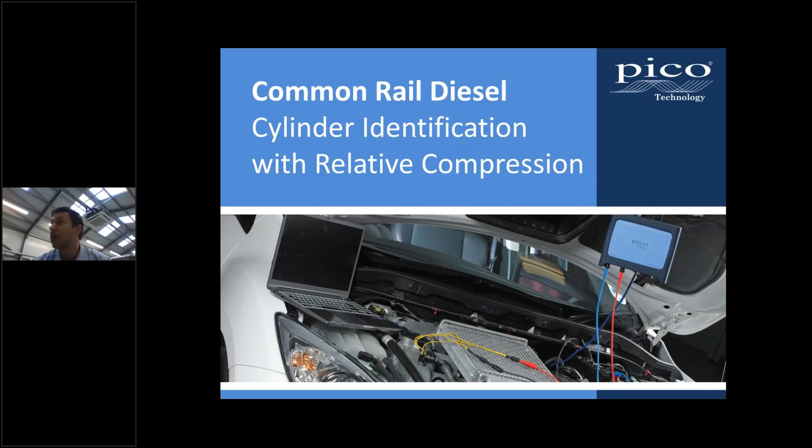To start with, we're obviously going to need to download the software, so PicoScope Automotive. To go there, you'd need to visit our website, which is picoauto.com, and then find the downloads page. When you do the download, you'll actually have two bits of software that are automatically installed at the same time: PicoScope 6 Automotive and PicoDiagnostics.

Now, to be honest with you, a lot of people that we speak to never really use PicoDiagnostics to its full potential. Hopefully after today, you'll see how simple and non-intrusive it is to actually get some really useful information from it.

So as I said, the idea being non-intrusive. The two that we're actually going to look at, you'll see there's a number of different options when you open the program. The two that we're going to be mostly focusing on today are the battery starting and charging, and the compression test.

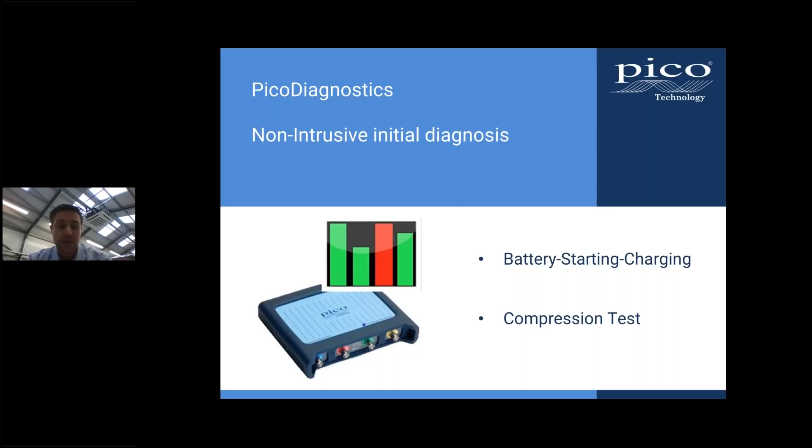Okay, so onto the connection. So we'll start with the battery starting and charging and how to connect. It's very, very simple and straightforward. All we're going to be doing is taking our PicoScope and we're going to connect our x1 test lead, and we're going to connect the signal wire to the battery positive and the black signal ground to negative, and we're going to use our 2000 amp current clamp around the battery positive or negative, whichever is easiest to get to.

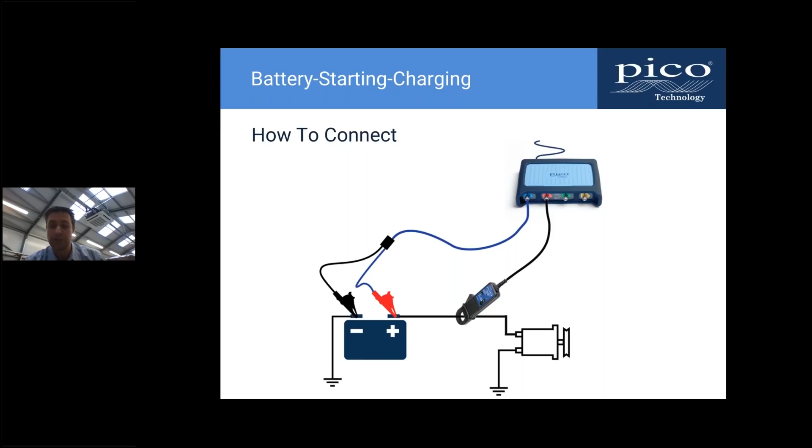So we're just going to move to another camera so then we should be able to have an overview of what we're doing. So there we go, right, so I can stop now.

So Barney, we should still just have me on the camera now. Is that correct? Yeah, perfect.

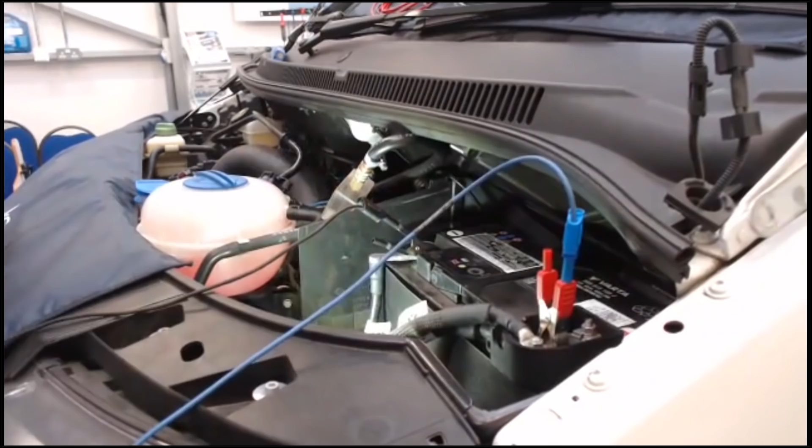Right, okay, so if we move across, so we have our scope already connected to our computer. If we look at the battery, we have a x1 test lead. We're going to take our signal lead onto battery positive and our signal ground, or our ground lead, onto battery negative. That will then be connected into channel A, and then the current clamp.

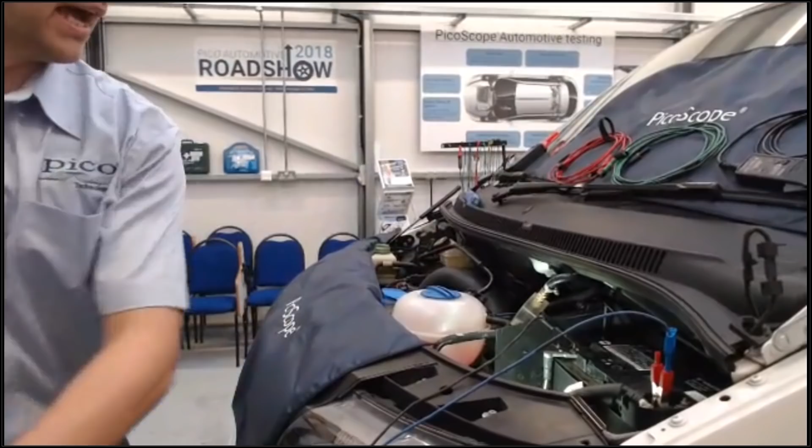So you'll see from the current clamp itself, we have two different options: 200 amps and 2000 amps. For this test, we are wanting to be on the 2000 amp range. Now you should see that we have... we'll just wait for that. That's breakfast van coming through, perfect.

So yeah, as we were saying, the 2000 amp current clamp will have the battery on light. Now this clamp actually has a function where it will automatically turn off. To prevent that from happening, we can actually turn the clamp off, press and hold the 0 button, and turn on. Now we have the red light on, which means the clamp will stay on permanently until the battery runs out. For the purposes of the test today, we're going to leave it on because I don't really want it going flat or turning itself off halfway through.

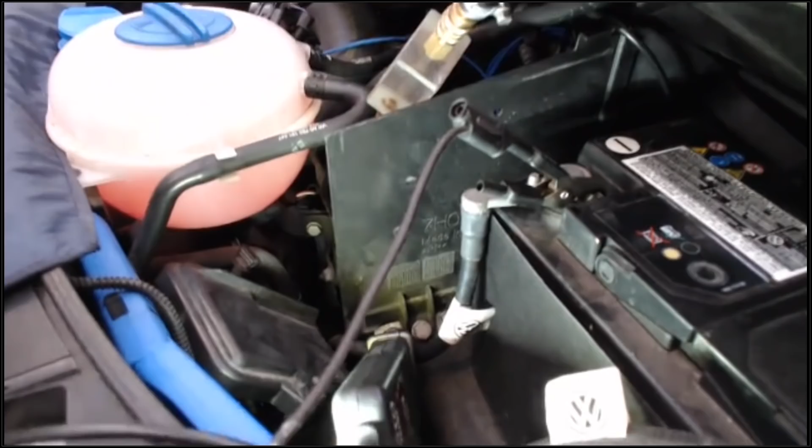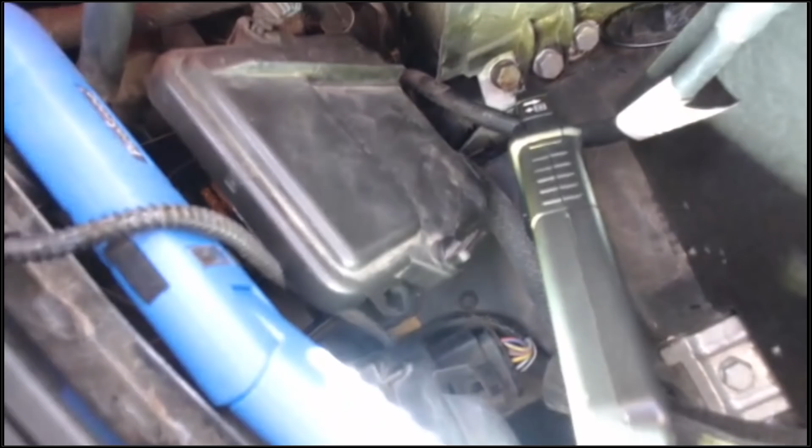So we're going to use the battery negative to clamp the current clamp round. We can see the arrow on the current clamp, if you can get in there, Steve, and see that—you should see the current clamp arrow there. For the battery negative, obviously current's flowing back to the battery, so we can point the arrow towards that point. If it was on the positive side, then the arrow points away.

Current clamp then on channel B, and that's it, that's our setup done. So what we can do now is I will come back to this camera. We will reshare the screen, and we are actually going to look at the PicoDiagnostics program.

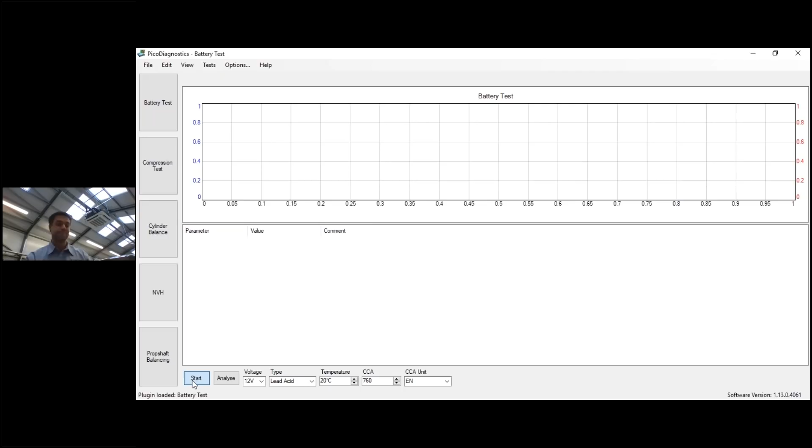So with everything set up, all we need to do now is start. I'll run around and start the engine.

So I'm happy that this battery is good, so I can move on to the next tests.

Just want to move back to the presentation. So that's the connection done.

Making sure that you've got a good battery and good charging system is one of the very first things that you do in your vehicle health checks. That's quite a nice, easy, important one. And with this result, we can also print this off and give it to the customer. So quite a nice, useful tool to prove that you've done something, but without having the need to buy expensive battery test equipment.

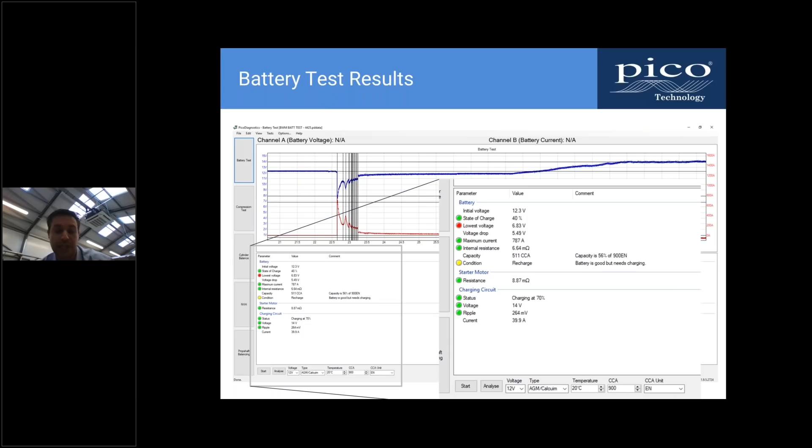So the next test we're going to be looking at is the relative compression test. Now for this test, it's even more simple than the original battery test. So all we're going to need is one test lead, which goes across the battery, as we can see there.

We do need to be mindful that we need to make sure the engine can't start. So we need to prevent the engine from starting, and ensure the battery can support 6 seconds of continuous cranking. As I said before, the reason why we do the battery test first is to make sure that the battery is capable of cranking the engine for that period of time.

Important thing again to mention there is prevent the engine from starting. So to stop a diesel engine from actually starting up, there's a number of different ways. We can disconnect the injectors, take away the fuel pump, crank sensor, or just completely remove the fuel supply altogether, which will result in the vehicle not starting. So picking the most accessible is usually the quickest option. Normally the injectors themselves can be just removed quickly.

So if we just now come back over to the vehicle and how we're going to do the setup.

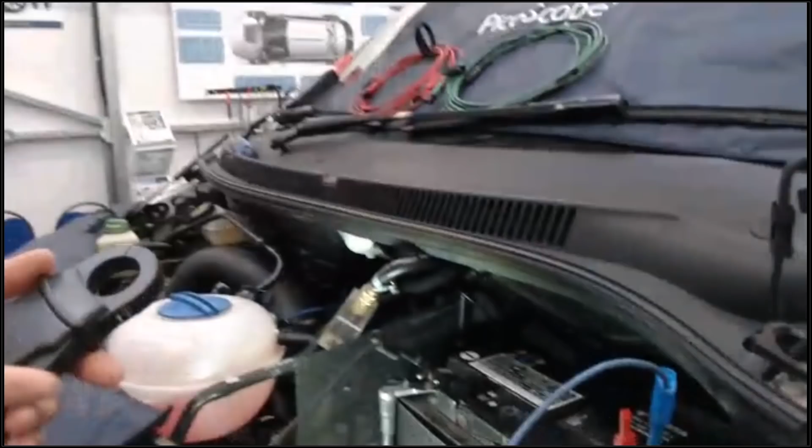So as I said before, we don't need the current clamp anymore, so we can remove this from our setup. And all we're going to be doing is just using a simple test lead across the battery, and it's only battery voltage that we're interested in at this point. This makes it a very simple and very quick and easy test.

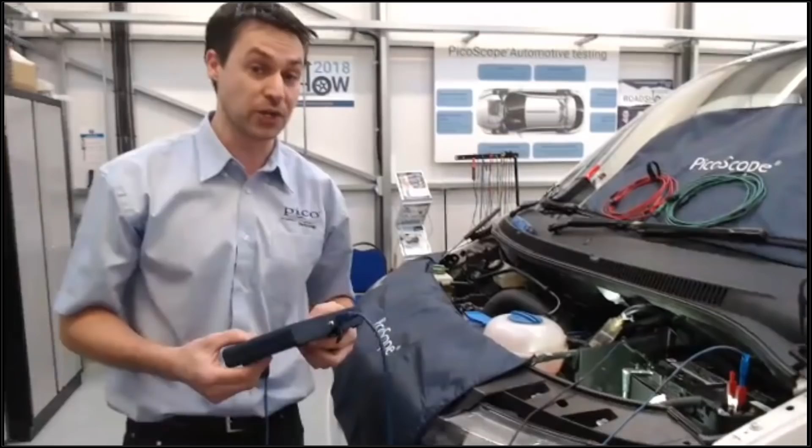Okay, there we go. Right, perfect. We should be back up now. Fingers crossed. Said to be patient.

So we come back into the engine bay. Now what we're going to do in order to prevent this vehicle from starting, we actually have a nice easy fuse just down under here. This fuse provides the power supply for the inlet metering valve. So if we remove that on this vehicle, the inlet metering valve removed, it will no longer start. So we can perform our relative compression test very easily, not having to go anywhere near the injectors. It's very simple.

Okay, can go back to our PicoDiagnostics program. And to do that, we're now going to click on compression test. It will ask you if you wanted to save any data. If it's a customer's vehicle and you want to collect all your evidence, make sure you keep it saved. For us, to fill out on this point, we need to tell it how many cylinders it's got, make the connection across the battery, and press start. Ensure the throttle is held fully open during this test. That's fine, okay, and if we could crank the engine please.

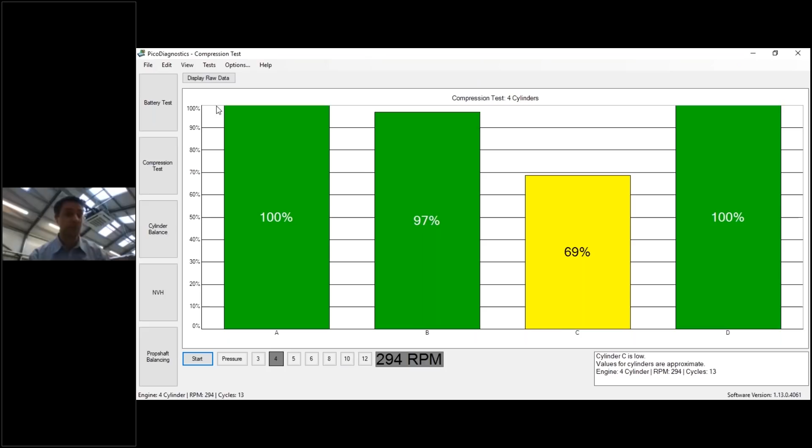So the whole purpose of this presentation, then, in this webinar, is how can we actually determine what cylinder that is.

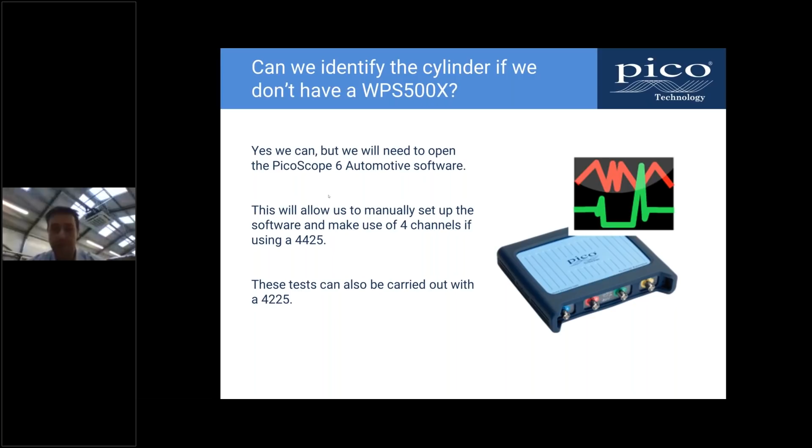So, setting the scope up manually for relative compression. Now, if we've never seen this screen before and we're new to oscilloscopes, something to get into the mindset about: don't be afraid. Connecting the scope up to a vehicle is no different to how we would use a multimeter. All we're introducing now is a time factor.

So the screen that you're presented with is formed up of a grid. Now this grid is split up into a number of different ways, and we now have things called divisions. Across the screen you should be able to count that there's 10 divisions, and the voltage axis for whatever range or accessory we're using is now in the vertical axis.

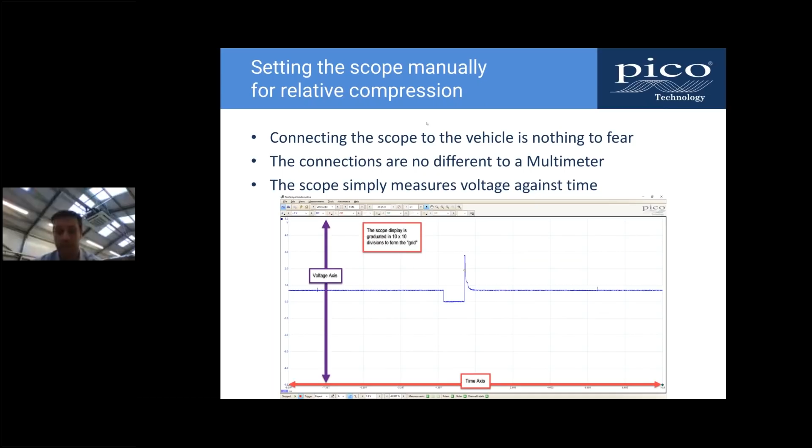Right, okay, so taking your first measurement. We can set the scope up to capture any signal automatically. There's a couple of things to remember, and it's up to you, but I like to try and remember what probe it is I'm using, what the range is, how much time do I need across the screen, do I need a trigger?

So our first thing, which displays... there we go. Hopefully now guys you should have the slide with probe setting on the screen. So selecting the correct probe is essential to a good capture. There's no point looking at battery voltage when you've got a current clamp set up, it will be in completely the wrong scale. So make sure that we're selecting current probe if we're measuring current.

Now for the next bits of the test, we'll come back to that as we move forward. We'll do this live as well, and I will set this up live within the software. So you'll see you'll be able to click on channel A. It will give you a drop down, and where it says ×1, which is our current default, our ×1 test lead, you'll now be able to click on that box, and it will bring up a number of different options for you to select.

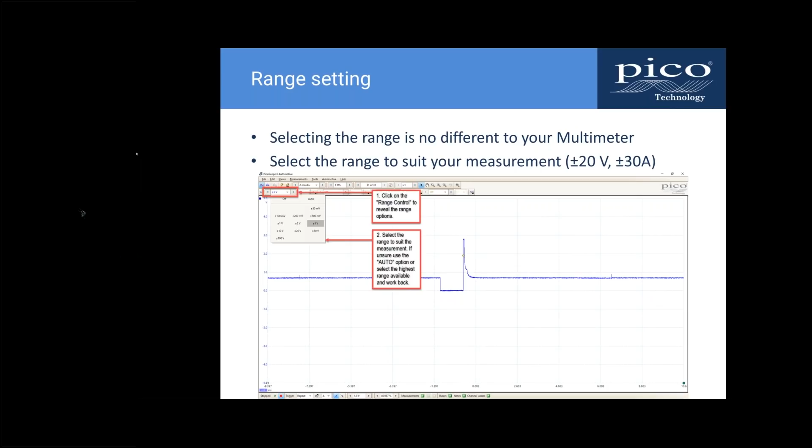So the next bit to be aware of is the range setting. Again, no different to your multimeter. Instead of twisting the dial to select whether you're looking at current or voltage, we just need to make sure we're selecting a range that's good for our measurement. If we're looking at battery voltage, make sure that you allow for ±20 volts. You could just leave it on auto and it will automatically do it for you if you're not sure. But also make sure if you're looking at current that you've got the highest one. If you're looking at maybe injectors, go for your highest one first, and then step down if it looks like it's too far out.

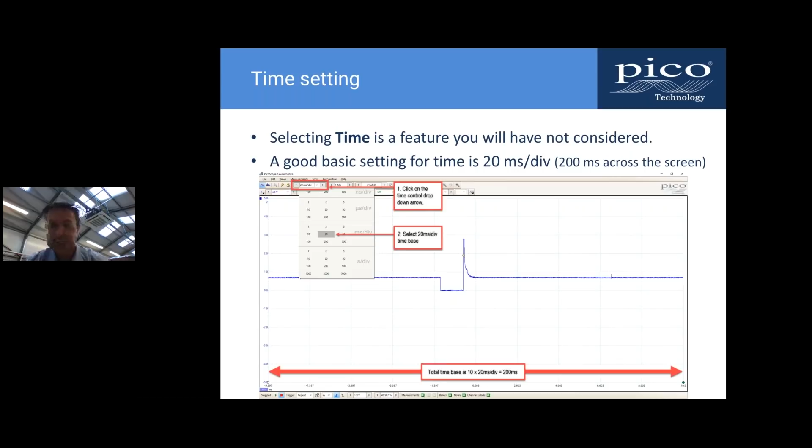And onto trigger setting. Whether or not you want to put that in, triggers do help stabilize your waveform on the screen. When you set a trigger, it has to meet certain specifications that you put, so the waveform has to cross certain points for it to actually be stabilized on the screen. One of the things we would always advise, if you're not used to using triggers, is to use the auto trigger. What that will do is wait for a certain period of time, and if the trigger isn't met, it will carry on. Using the other settings, which are repeat and single, if the waveform doesn't pass through the specific conditions that have been set, you won't have anything happen on the screen, it won't work. So as long as we want to make sure that we've got something on the screen, I suggest just using the auto button to begin with.

Another important factor here to mention is our sample rate. I'm just going to wait for that slide to load. Typically for automotive use, we found that 1 million samples is more than enough for what we need to do and gives us good detail, especially when zooming in. So stick to 1 million samples.

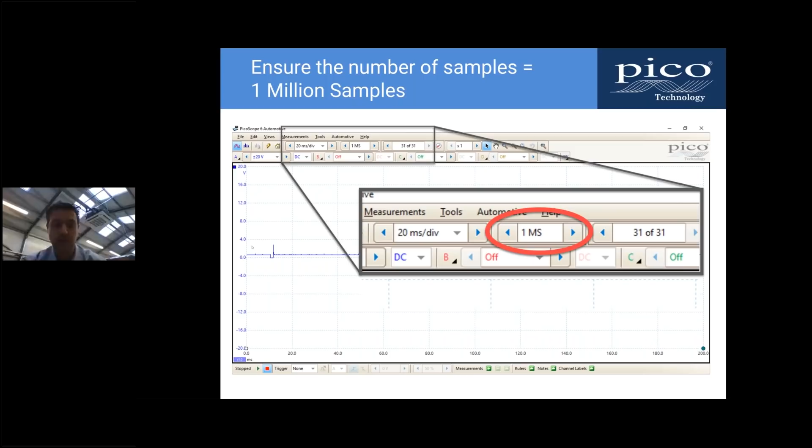Okay, so what we're going to do now then, guys, is we will do the setup and do a capture as we did with our PicoDiagnostics software, but this time we're going to do it in PicoScope 6. Now, you'll notice I put on there about the initial results. I'm going to use a current clamp for this setup, only because it's easier to associate a peak in current as a compression event. So, as we said before, pistons coming up on compression will naturally draw more current, or the starter motor will draw more current in order to keep the engine rotating. So it's just more of a visual thing than anything else. There'd be no reason to not use voltage if you're more comfortable using that.

Let's just go quickly back to our camera, and we'll just show you the setup from that point of view.

There we go. So again, we're going to use the same idea as before. We're going to prevent the engine from starting, so we've still got the fuse removed for the inlet metering valve.

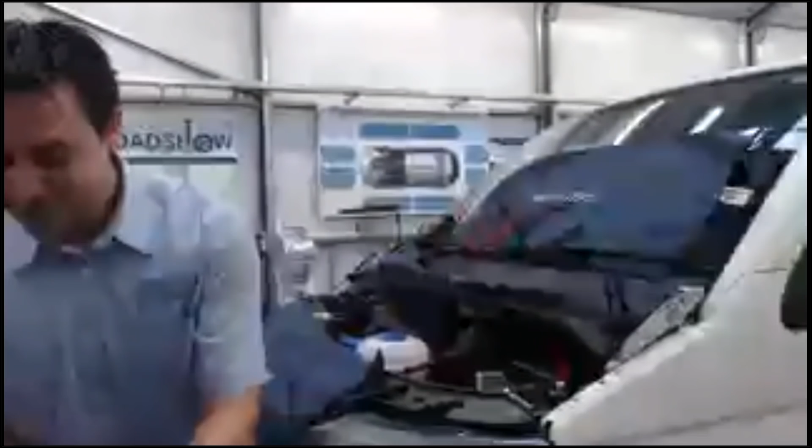Now instead of voltage, we're just going to take the test lead off and use the current clamp instead. So current clamp back on again. We'll put it into staying on all the time, permanently on. Again, round the negative lead, and onto channel A. Okay, lovely.

If you wanted to just have a little play, have a little look at some of the other files - if people have sent other files in as well - there's nothing to stop you just using the software, getting to grips with it, having a go and seeing where all the different things are. Obviously when you're good and ready, then get your scope connected and go from there.

Time-wise, as I said, this is something new when we're looking at an introduction to oscilloscope diagnosis. For this cranking test, we obviously want an extended crank. If we remember that the grid is split up into 10, if I did 1 second per division, that now gives me 10 seconds across the screen, which is more than enough to perform a relative compression test.

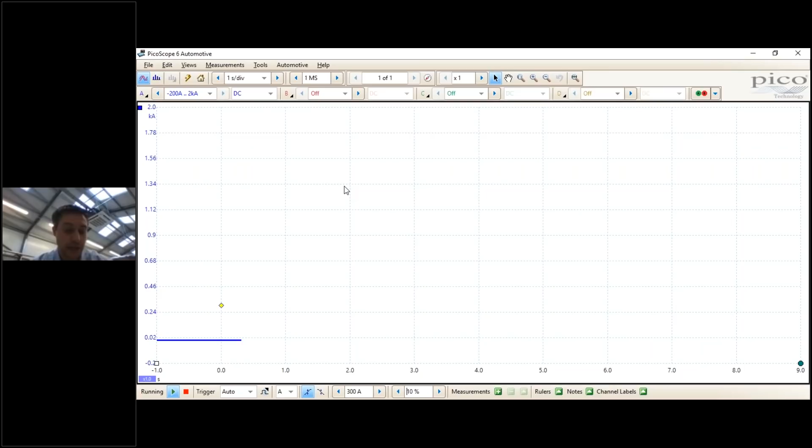Now, as you can see, just before the waveform actually comes up to that trigger point, it stops for a second and then continues. When we're saying about using auto in the beginning, it doesn't matter if your trigger doesn't meet those requirements, or if your waveform doesn't meet the trigger requirements, because it will still capture something on the screen.

For what we're going to do today though, I'm going to put this onto repeat, and you should see now that that waveform does not pass that diamond until we've met the specifications which we've set, which needs to be 300 amps. It needs to see 300 amps in a rising direction, and that's when I want the software to start capturing data.

So, Barney, yeah, if we can crank the vehicle. Thank you.

So there we go, guys. So I can skip back, and there we have it. That is our relative compression waveform from PicoDiagnostics, but now in PicoScope 6 Automotive.

Within here, obviously, we've got a number of different tools. So we can zoom in on certain parts of the capture, and you can see here also that we've got these rulers on the side, so I can bring these down and start actually making measurements should I need to.

All I'm interested in at the moment though, is this drop, this oddity or anomaly within our waveform capture, where we have 3 very good peaks and then 1 not very good. So this is the one we're going to focus on. This is the one that's reported in PicoDiagnostics as a cylinder down on compression. So now, how do we identify what cylinder that is?

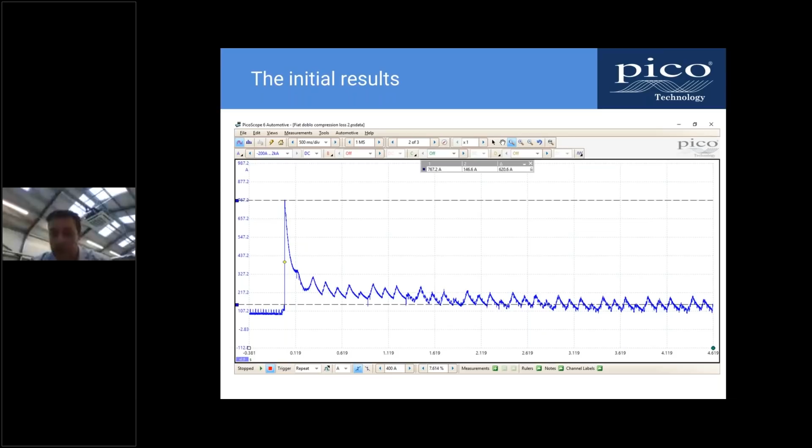So, determining cylinder 1. Wait for that to come on. It should be there in a second. There we go.

When identifying cylinders, we normally use an ignition or injection event for cylinder 1, and then use the appropriate firing order to determine the rest.

As before, to carry out the relative compression test, we have to prevent the engine from starting. But disabling the engine on a common rail diesel removes the injector signals. So how would we actually determine which cylinder it is? How do we get our reference for cylinder 1? How would we start to do that?

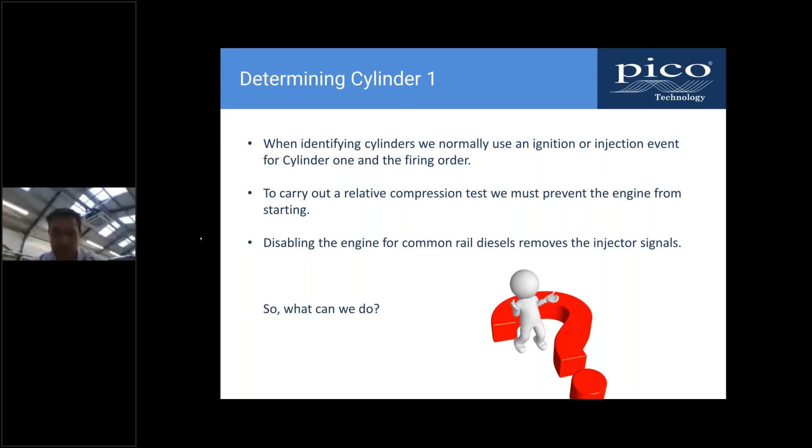One of the things we can do is start thinking about constant signals. When the engine's rotating, what else is rotating as well? One of the things that comes to mind is obviously the camshaft. So if we could use the camshaft position sensor, which is used by the ECM to determine cylinder identification, then we can do the same.

By running the engine and viewing the camshaft position signal with cylinder 1 injector, we can see the relationship between the two. Once we know that relationship, if the injector signal is no longer present, we can run our relative compression test with our camshaft position signal and then determine which one was cylinder 1.

Some points here, guys, we do need to be mindful of timing. It may be that cam-crank timing is out. What if the vehicle comes in and the timing has shifted? So actually we've got a valve, or the compression issue is due to valve damage, no longer holding compression. If that's the case, we need to be mindful of that going forward.

But we'll look at something called the Waveform library, if we're not already aware of it, and how we can use it to determine cam-crank timing going forward, and making sure the engine mechanically is okay as well.

So, should we get to the next one? Right, okay, so let's do the setup then, guys.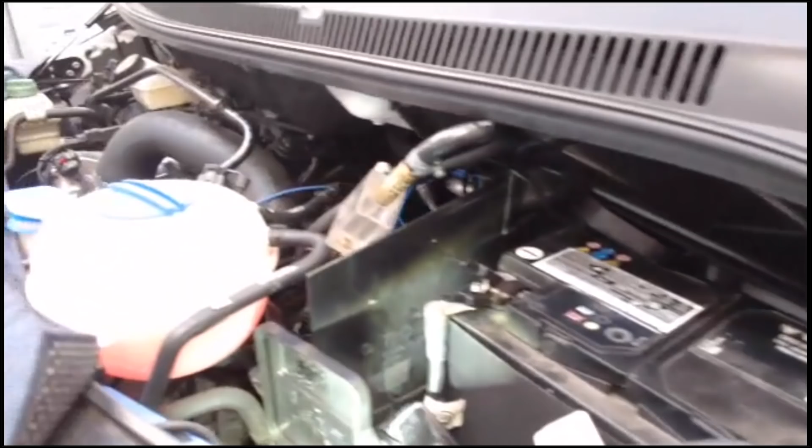So for this test, we're going to keep our relative compression test on channel A. We now want to introduce cylinder 1 for our reference. The best way to determine the cylinder 1 injector is using the current clamp. This is a great little clamp, gets in nice and easy, plus it's non-intrusive, so we're not having to disturb any of the wiring.

In this instance, we have put a breakout lead on the cylinder 1 injector, only because it's actually trapped underneath part of the inlet manifold. So bear that in mind when you're looking to get your reference.

You don't have to use cylinder 1. If it's easier to get to cylinder 4, why not use cylinder 4? Just bear in mind that when you're looking at it, you know that that's cylinder 4, and then set your firing order accordingly.

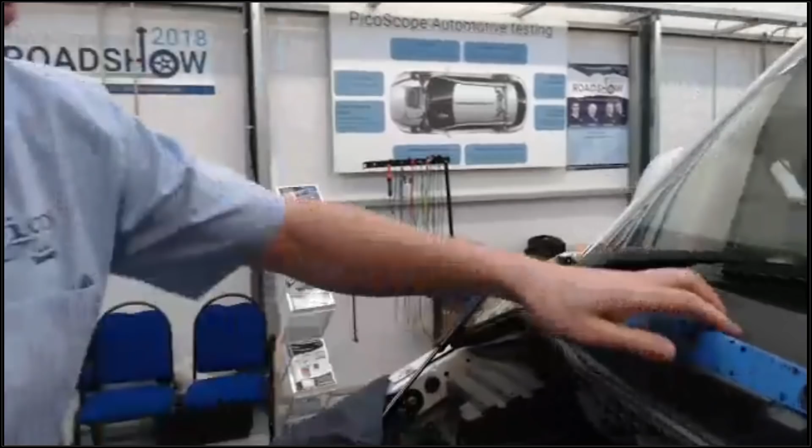So for us, we are going. We can get in there. Let's just shed a little light on the situation, so you can see the breakout lead we've got there for the cylinder 1 injector. Oh, drop the torch.

Current clamp onto the breakout lead, zero the clamp once we're in position, and then put this on channel B.

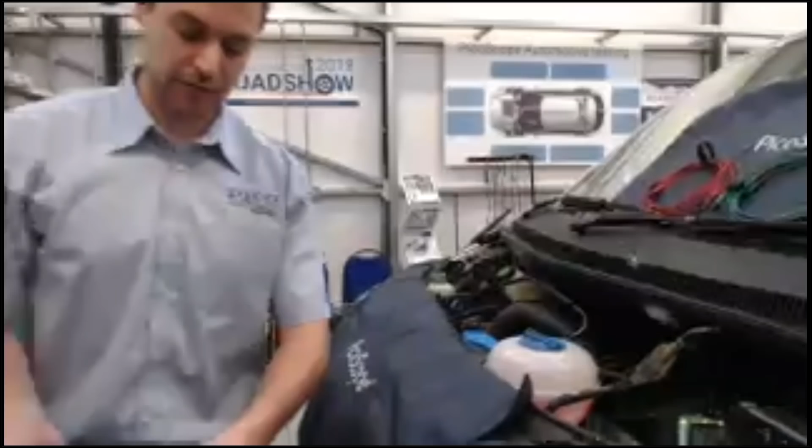Then we need to place our camshaft position signal onto channel C. Signal to ground, and then our signal lead onto the output.

Again, guys, we already have these set up for training purposes, and the van was used on the roadshow, if any of you got to come and see that this year. So all of these leads are already made up and broken into. Breakout leads do make things a lot easier, but if you can't use breakout leads, then do what we need to do.

Great. So I guess then, guys, there's nothing more to it, but let's take a capture of what we've got there.

The important thing here to remember is that the engine needs to be running. We need to see the relationship between cylinder 1 and the camshaft position sensor. So we need to refit our fuse, and then restart our software.

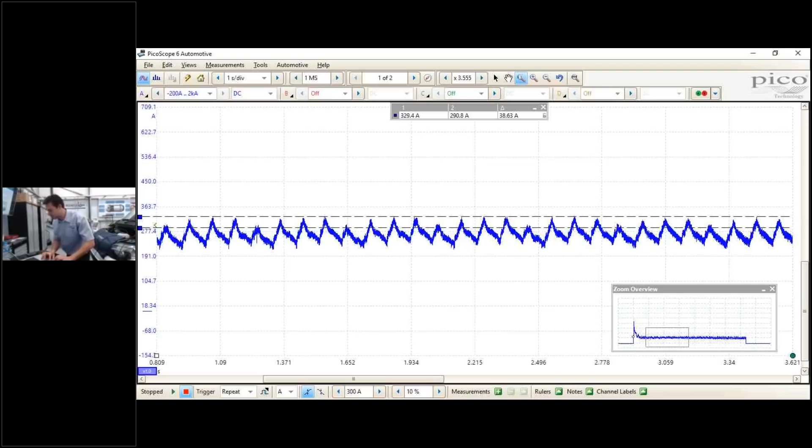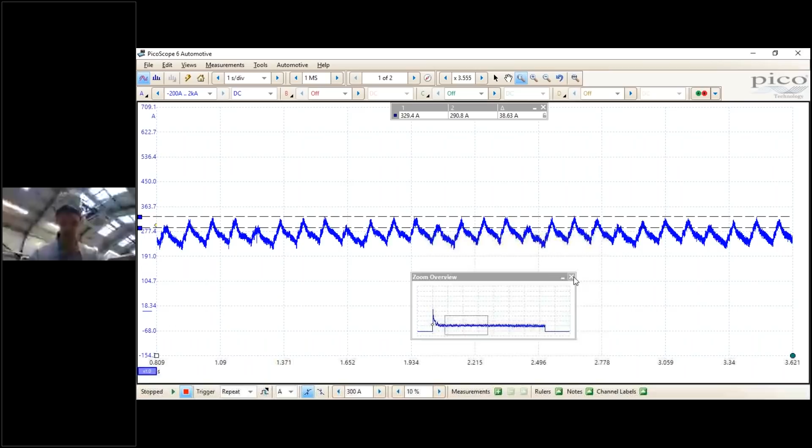So what we'll do now is come back to the software, PicoScope 6. There we go, we should now have that on the screen, guys. Move that back to here. Okay, now we obviously need to make some amendments. We need to tell the software that on channel B, we now have a 60/20 current clamp.

So channel B, probe, and then this is in the 20 amp mode, so we can click 60 amp, 20 amp. Now, interestingly, this vehicle has got piezo injectors on it. For this purpose, it's absolutely fine to use this version of current clamp, it's not a problem, but you can see the range goes from -5 to 20 amps. Not so much of a problem for the purposes of this test.

However, if you're looking at piezo injectors with the current clamp, it's better or sometimes easier to switch to the 30 amp current clamp. The relationship between the current clamp and how it outputs it as a voltage is exactly the same with the 30 amp as it is with the 20, there's no problems in terms of amplitude or the scaling factor between these two clamps. But it does mean that when we look at the range, we have now ±20 or ±30. So we can go ±20 amps and we'll get the full effect of the piezo waveform, or the current waveform from a piezo injector.

Channel C is going to be our camshaft position sensor, so on probe it's just a ×1 test lead. Now I'm not entirely sure of the range at the moment. If it's Hall effect, they're typically 5 volt, however if you don't know, go above. This is a 12 volt vehicle, so most things are going to be ±20 volts. Doesn't matter if it isn't for the minute, we can just go bigger and then rescale later on if we need to, or redo the test again.

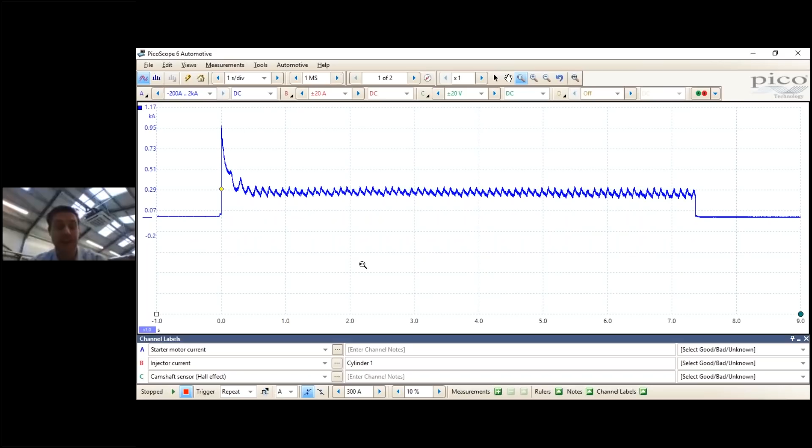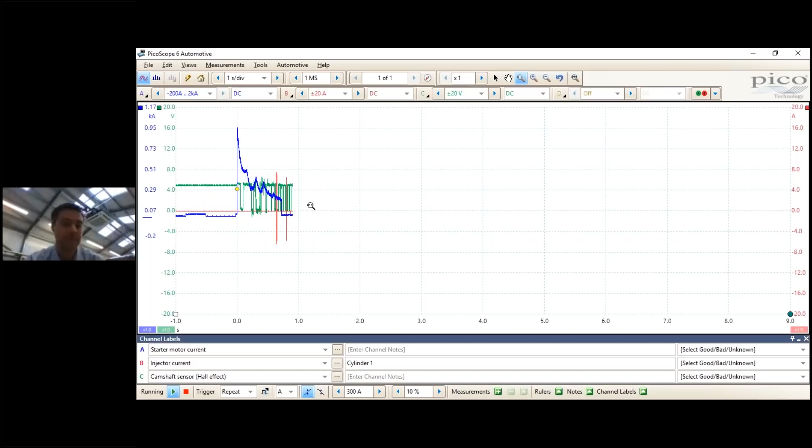Okay, so setup wise, I'm happy. Trigger, I'll keep the same because I know my current's going to peak above there as I start the vehicle. So I can leave my trigger in place and we are good to go. If we can start the vehicle then, please, Bonnie. Excellent. Perfect, that's lovely.

Okay, so now let's look at this relationship between the camshaft and injector signal then, shall we? So we can use our zoom tool again, up here we've got our zooming tool. Again, we can go in a closer still if we would like to.

So as you can see now then, we have cylinder 1 injector signal, and then it repeats again. We can use our rotation rulers now to actually mark out where the other events would theoretically be, or the other injection events for the other cylinders would theoretically be. So bringing out the rotation rulers from the right-hand side, we now have the option to use partitions, so we can split the segments up between there and roughly work out where the other cylinders would be in relation to this. So we'd have cylinder 1 here - we know that's cylinder 1 because we've put our current clamp on it - 3, 4, and 2 using our firing order.

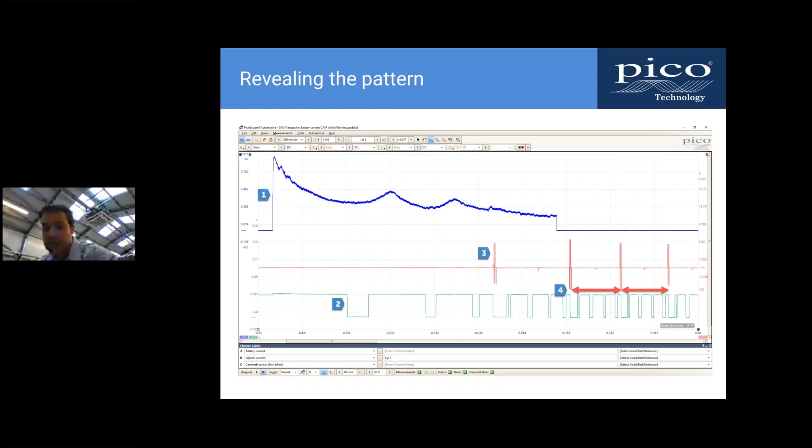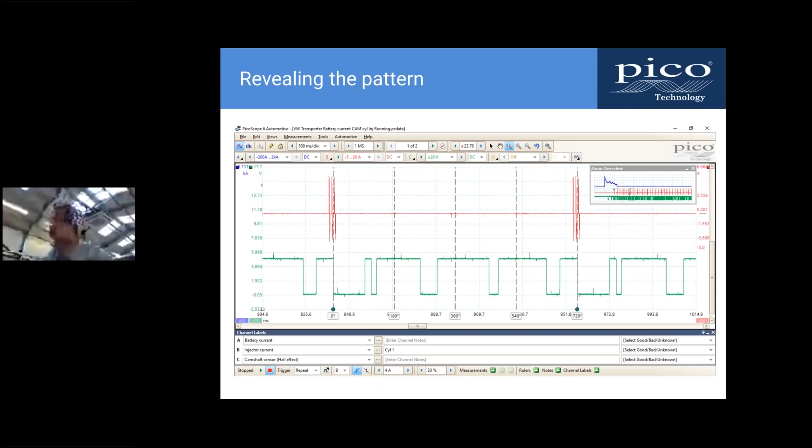Should just move on a little bit more. That's how we said about revealing the pattern and using the zoom tools. Here we have what we've just seen, what we've just captured live. As I said before, this is where we're looking at that falling edge. Then we have cylinder 1, cylinder 3, 4, and 2. So as I said, these are the theoretical positions of when the other following injectors or injection events will take place.

Now, as we said before, disabling the engine during a relative compression test, we are going to lose that injection signal. Ways of actually keeping an idea of where it is - I know we've all sort of seen where that injection event takes place in relationship to the camshaft position sensor, on that falling edge before the pulse, before the small pulse. But we can also use reference waveforms to actually keep that image up on the screen for us.

So, I tell you what, let's just do this live. We might as well. If we come back to this screen here, I'm going to zoom out. I'm going to get rid of those rulers. Now, one of the easiest and quickest ways of doing this is we can right-click on the screen, anywhere in the grid - it's absolutely fine.

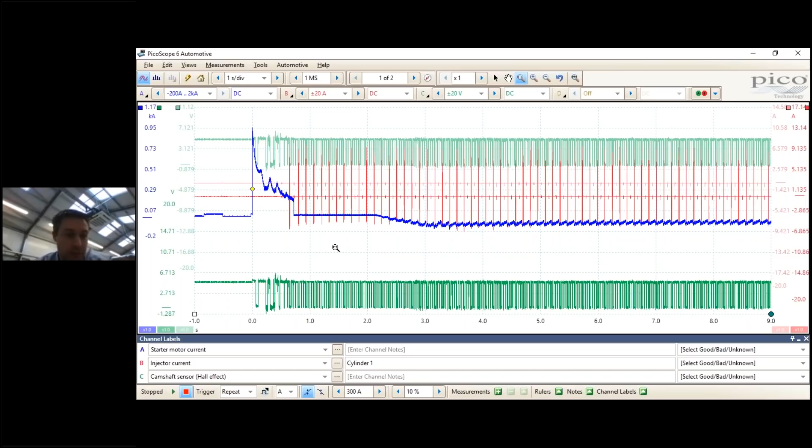And you'll see there's an option for reference waveforms. So from here, for any active channel, we can make a direct copy of whatever we have on the screen at the time. So I want to be able to keep channel B and channel C. You'll see behind there, if I go forward in the buffer, you'll see how they're still there - dropped in behind, slightly fainter, but still there for us to use and call upon for the next capture. So if I now start the scope again, you'll see the captures are still there.

What we'll also do now is disable the engine. So I'm going to take that fuse out for the inlet metering valve. And we're going to crank the engine.

So as we can see now, we have our current clamp still around the negative cable, given now we're back to relative compression. We can see also here, guys, that we now have live data from the cylinder 1 current clamp, and there's nothing on it - no signal there at all. However, we do still have a camshaft position sensor. So we know from earlier, and we can call upon this as well if we need to, that our relationship between ignition from cylinder 1 and injection from cylinder 1 was on this falling edge in front of the small pulse.

So what we can do is bring our rotation rulers out, mark it on that falling edge, and then place it also on the preceding falling edge in that pattern. And now we have a relationship here. So if we remember rightly before, guys, this would be cylinder 1, 3, 4, 2, back to cylinder 1. These peaks indicate a compression event - we know this from our relative compression test. So we have a peak for cylinder 1, another peak for cylinder 3, and a smaller peak for cylinder 4. So have we now not gathered that our compression issue is identified on cylinder 4, because it's not pulling as much current?

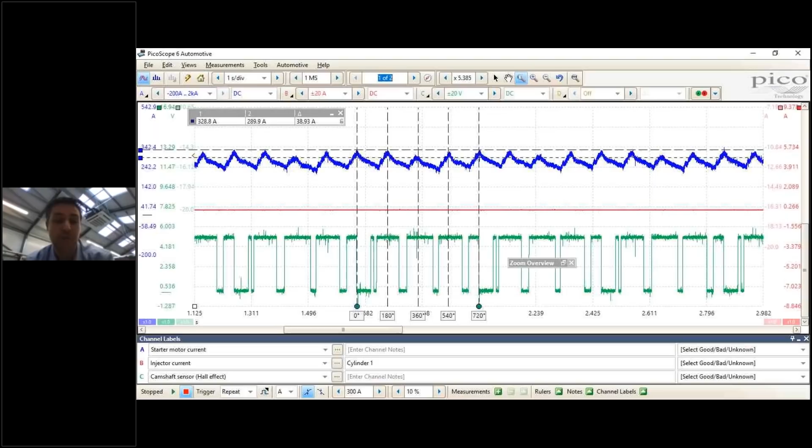I guess one thing we were going to mention was the waveform library. How do we find a known good version, making sure we have good cam, crank, and ignition signals from vehicles? If people haven't seen this before, we need to make sure we have the scope connected, using an automotive scope with the automotive software to gain access to the waveform library. We also need an internet connection and a login for the forum. To get to the waveform library browser, click on File, and you'll have the option there. Fingers crossed, it's already logged me in, which is fine.

Now we should have the options to actually search and find known good or reference waveforms that we can pull down directly. So if we were looking at this particular vehicle, this is a VW, and it is a transporter. That's all I'm going to put in for the minute, and we can click search.

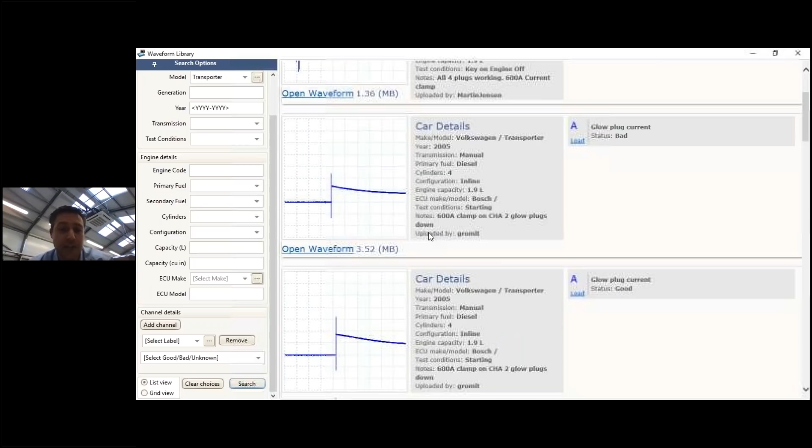And then we have all the options here. Now, if you know the engine code, you can also type that in. We do know what fuel it is, which is another option, you can put that in as well. However, I think we've only pulled 13 options. When you click on here, you can actually see in brackets a number, and that number represents how many waveforms are available for that model of vehicle.

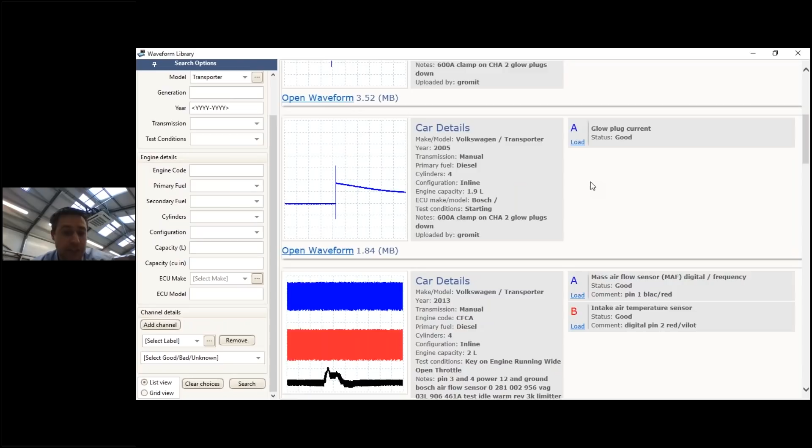So if we scroll down, oh look, as luck would have it, a guy called Ben Martins has uploaded a waveform to the waveform library from a VW transporter. How nice of him. Now we can either just zoom in at this point and see. Interestingly, he's actually used voltage there instead of current, which is fine, we can do, but if we just wanted a straightforward cam crank signal, we've also got this here as well. There's plenty of options there for you guys.

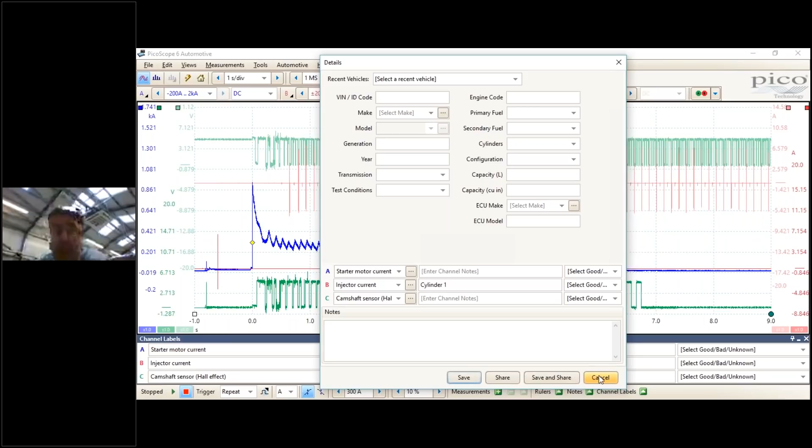I think it would be good to get into the habit of using the waveform library almost as a cloud for all your own waveforms. So if you were to click Save As, you see the option here to save and share, or just share. If you filled in all your details and got some notes on there as well, click Save and Share. You're connected to the internet, why not? Then they're automatically uploaded, one for you to see whenever you need them. Also, heaven forbid, if your laptop breaks or you lose all your content or your own reference waveforms, they'll all still be there. So if you go to your waveform library...

And again, this is where technology decides to trip you up, isn't it? There we go. See, at this point here, you've actually got my waveforms. So you can click on there, and anything that you've uploaded will automatically come up. And they're the ones that are for you, your own ones that you've uploaded. So these are ones that have been uploaded in the past, so they're always there for you. There we go. Good stuff.

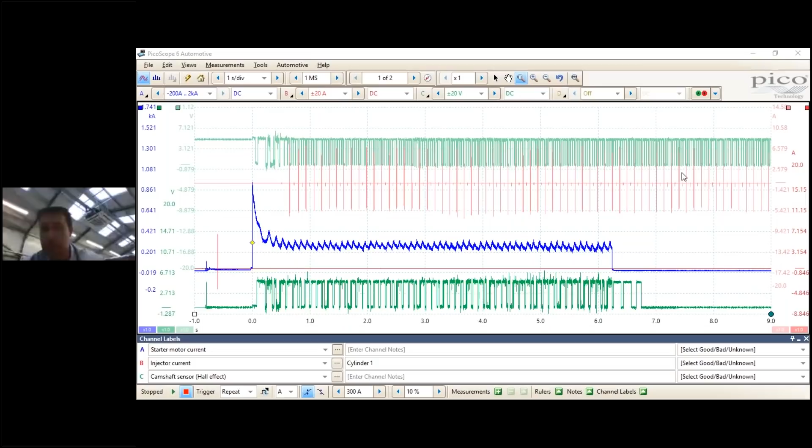Okay, right. Now we're going to move to some additional techniques, and some other options that we've got within PicoScope about how to do further analysis. So maybe if, for instance, you've got a vehicle with a slight misfire under load, so when it's idle only, there's no fault. Then the ways that we can actually bring more information out are things called math channels.

Usually this strikes fear into everybody that I talk to about maths, and they panic. But don't be afraid, and in the words of Mr. Steve Smith, math channels are cool. Now, I don't remember maths being particularly cool at school, but actually there is an ongoing topic on the forum, and I'll include some links in the chat. Obviously, if you need to find them, go to PicoAuto.com, go to the forum, and there is a link to useful links on there, and you'll be able to find the maths that's ongoing.

Now, Steve's doing some great work there, and you can download these with the captures. One brilliant thing about math channels, they can be applied post-capture, so nothing you can do with your original data is ever going to be hurt. It's all just going to stay there, and you can apply as many math channels as you like to the captures, and they can be used to reveal much more information.

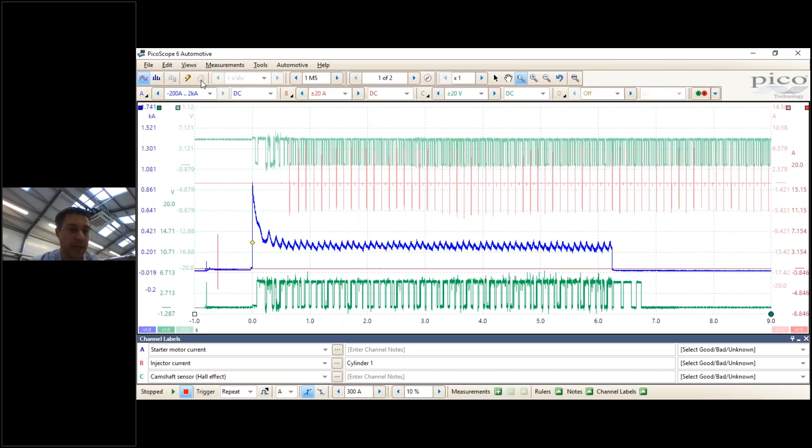Okay, so we now want to move back to PicoScope. I don't really need any of this information still on the screen, so one way to get rid of it all is click the home button, and that will reload all your default settings back into the software, so you're presented with a nice clean screen again. It's a nice quick way if you're moving between jobs to get rid of the information.

One thing to bear in mind though is that your channel labels will change. So channel A now for me is going to be plus or minus 20, but it's going to be my crankshaft position sensor. And channel B is going to be our current clamp again, as we're looking at cylinder 1.

So we should have the option now to put in injector current, and just add a note in there to say that it's cylinder 1.

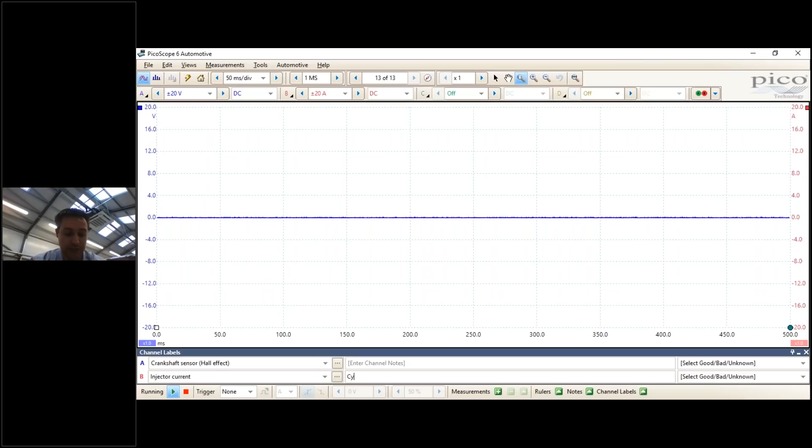Right, so we want to think about time again and how much time we want. We're probably not going to need a second per division at this point. Let's look at doing 500 milliseconds per division. Do you have the option here now?

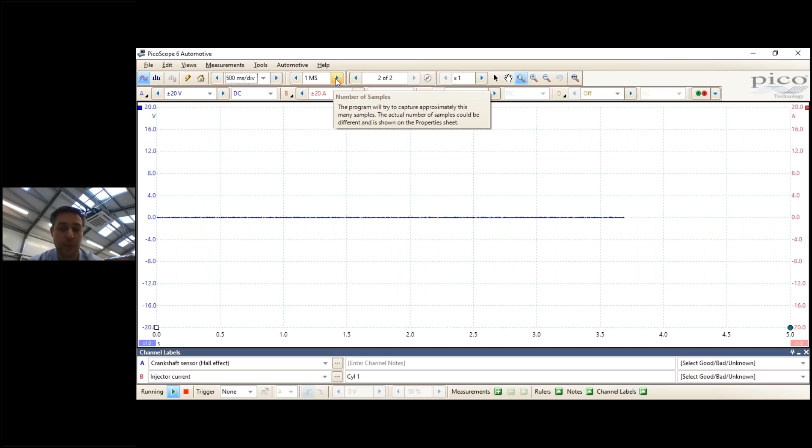Maths channels do like a bit more of a higher sample rate. You'll probably see it when we do it, but I'm going to increase my sample rate to 5 million samples. So what that means is that I have basically more dots on the screen to play about with. Think about it as almost like a pixelated camera.

If we used to have a 1 megapixel camera, and you try to zoom in on that capture, it's not as good as if we had, say, a 12 megapixel camera. It just gives you better detail when you're zooming in, but it also allows the maths channels to work a lot better.

Okay, do you know what then, guys? I think what we'll do is we'll just start the engine and we will run it and get some data on the screen, and then we'll go from there.

Hang on, got to put the fuse back in. It's got to start. Okay. Just let that go around again.

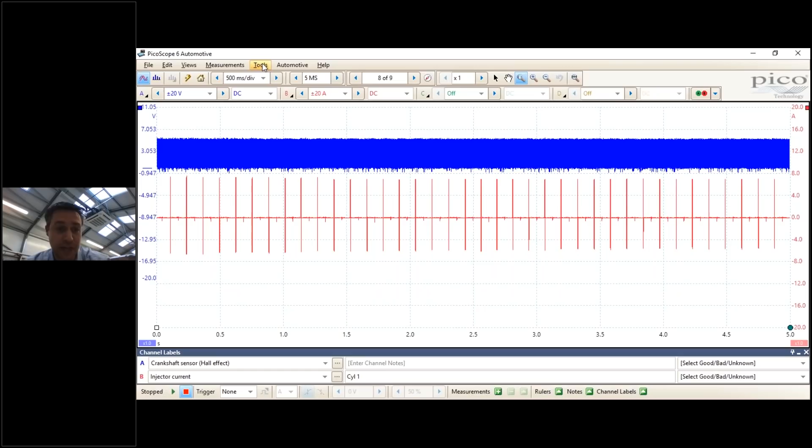Okay, so we now have our data and we are wanting to set up our crank math channel. Now, before we can do that, we need to actually determine how many teeth the crankshaft has. So we need to know how many points are on there for us to get our crank math channel correct.

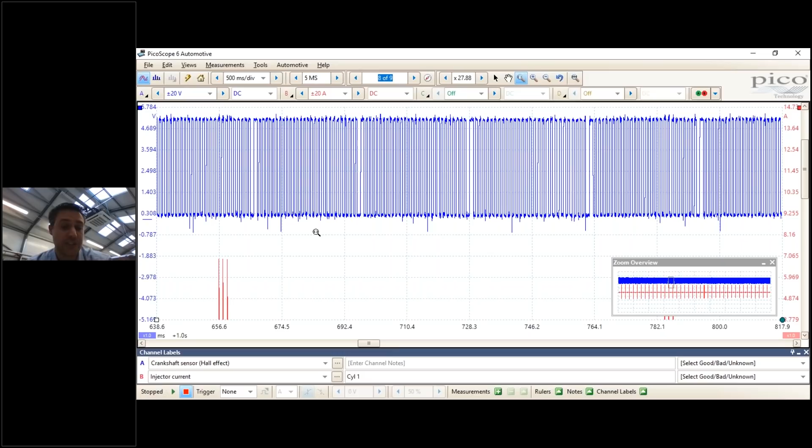To do this, we can zoom in. Now interestingly, there are some gaps going on there—if we didn't know any better, we'd say what is that about? Again guys, this is where you may want to go to the waveform library and determine: is that the correct signal for this vehicle? We can do it, let's have a look.

So if we do the same again, just wait for the waveform library to kick into gear. There we go. Hopefully guys you should have noticed we've actually made a few improvements to the waveform library and how we connect to it. It seems to me that it's a lot better in terms of connection and actually looking up waveforms. So hopefully you guys are seeing that as well.

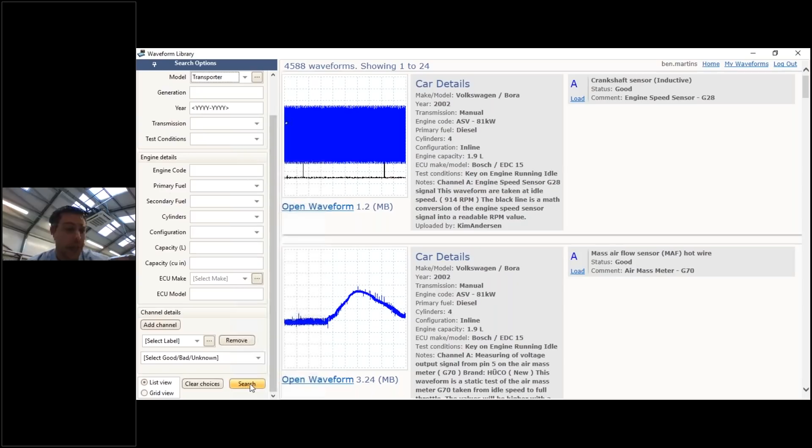So again, we've gone VW and Transporter, click search. Says that now—now it decides to play up on me. Okay, come on. Okay, here we go. Right, so we're not going to look at that one.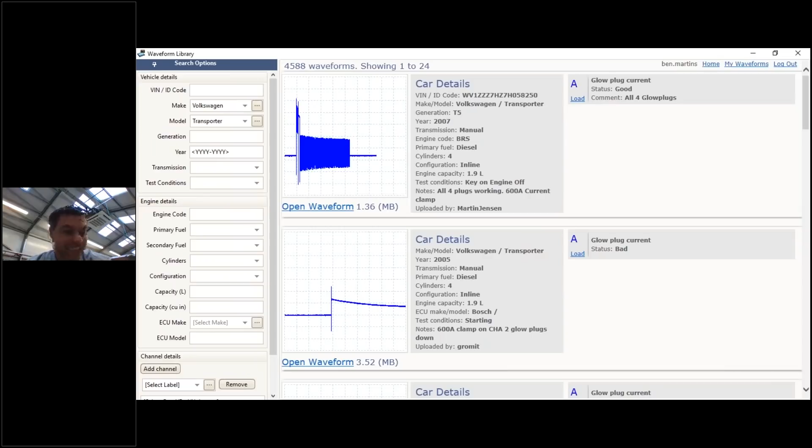We want to find one with a cam crank signal. So again, here we go. We can see on here that just by clicking on the image it gives us a slightly exploded view, almost like a zoomed in view. We can see here that between where we got the camshaft signal, we know there's the small pulse and small pulse, so we have this repeating pattern. We can see there are these 4 dropouts. As it is with this vehicle, there's 2 missing teeth, or 2 gaps on the crankshaft set at 180 degrees apart from each other. So we know that the signal we're seeing is correct, so we're happy.

Okay, so now once we know we're happy that's a true signal, we can bring our rotation rulers out again. We can place them at 720 degrees, so 2 rotations of crankshaft, so we should see where the injection event's taken place. So there we go, that's our full 720. We can now split that up into 360—so this here is 1 revolution of the crankshaft.

So I know that I need to count how many teeth are in there. Now you could look this up on technical information, however PicoScope you can do this a lot quicker, and we can do that using measurements. So pick a point—I'm going to pick this edge that's within the gap. We know that gap should be present, and that's 180 degrees round, and then the following one is our full 360.

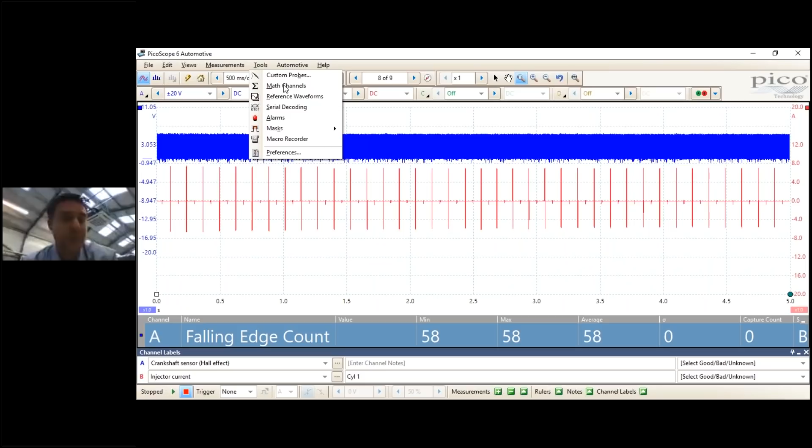Okay, so now onto the maths—tools and maths channels. This is the box that you are going to be presented with. Now obviously, as we said, maths is cool, right? So I've got a lot of options here—these are based on my library and they stay with it. However, the built-in ones are already there for you, so you have these options straight away ready to go. However, we want to create.

Enter the equation for this maths channel. We're going to click on Advanced, and here we have the option for crank. We click crank, it automatically puts it up in the box, but it's saying the formula is invalid. To complete the rest of the formula, we need to tell it I want to perform a crank maths channel on channel A and by 60 teeth. That's it, guys.

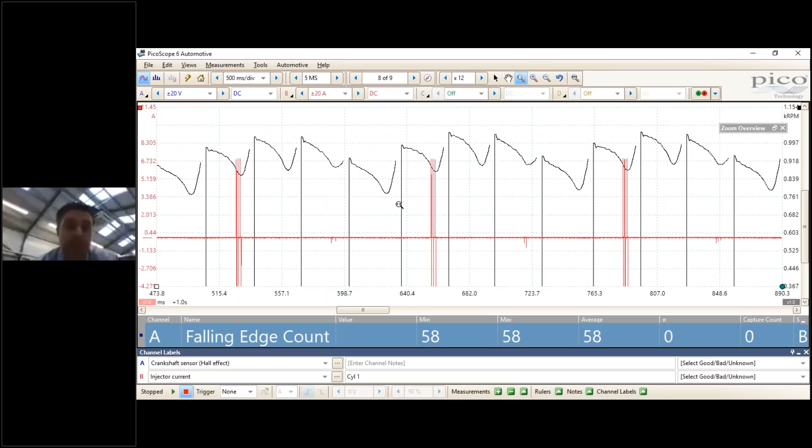Right, let's zoom in a little bit then. So what is going on here? Now, as we said before, with how misfire detection works, it looks at the acceleration and deceleration of the crankshaft. This is exactly what our maths channel is showing us - it's showing us the speed, the rate of change of the crankshaft in relation to combustion and compression.

So here we have cylinder 1, we have an increase or an acceleration as it slopes upwards. Actually, let's make this a little easier - let's bring the rotation rulers out again that we've been using and place them on our injection events. We can partition that up so we know here we have cylinder 1, using the firing order again - 3, 4, and 2, then back to 1 again. So it's this repeating pattern.

So if this is cylinder 1 acceleration, cylinder 3 is coming up here, this is where we start to get a decrease in speed in the crankshaft. Combustion takes place, so we have an acceleration again. 1, 3, and then 4 - what's going on there, I've done that slightly wrong, it should be there, sorry, this is my fault. There we go - so combustion has taken place, we have a peak speed here.

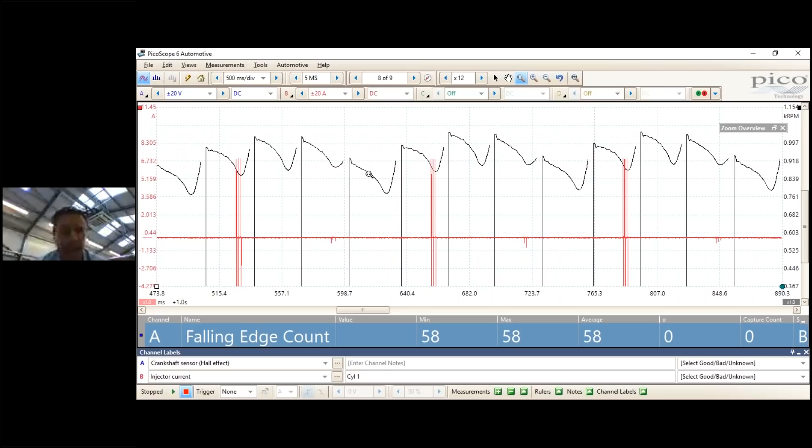So here we have this drop in speed at this point. Now we already know that we've put a low compression on cylinder 4. So 1, 3, and then 4 - there is no acceleration, no speed increase, and we get a big drop. Then we're back up to when cylinder 2 fires, and that's when we have this acceleration. So this, guys, is how we actually determine, or how the ECU looks to do misfire detection.

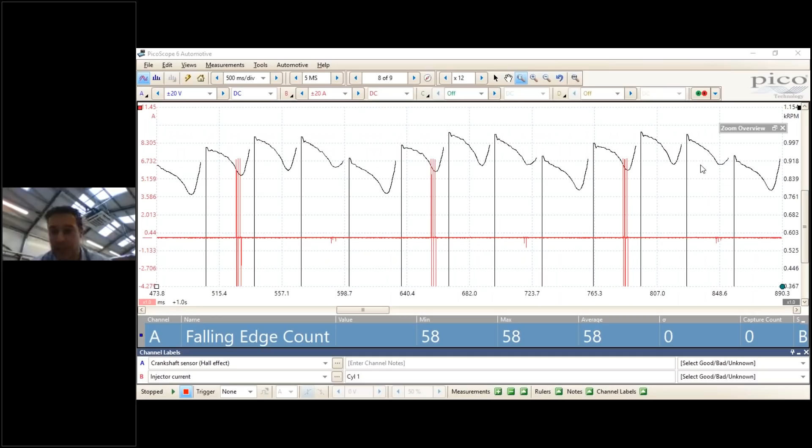Okay, let's just go back to our presentation quickly, because there's some further notes that might help us out a little bit. Okay, let's just wait for that to come on.

Okay, so we have using the crankshaft sensor to calculate RPM. We've set that up, we know that's good. So things that we need for our crank maths channel to work - we need the crankshaft sensor signal, and we also need to know the number of teeth. As we said before, that's quite easily done using the measurements feature within PicoScope. So, measurements, add measurement, which channel we want to measure on, what type of measurement - in our case, we used the falling edge count, between the rulers. You can use rising or falling edge.

And just to recap on our crank maths channel again - so in order to create the maths, we select tools. Just waiting there, guys, just for that to move to the next screen. For some reason it's going backwards now, which is odd.

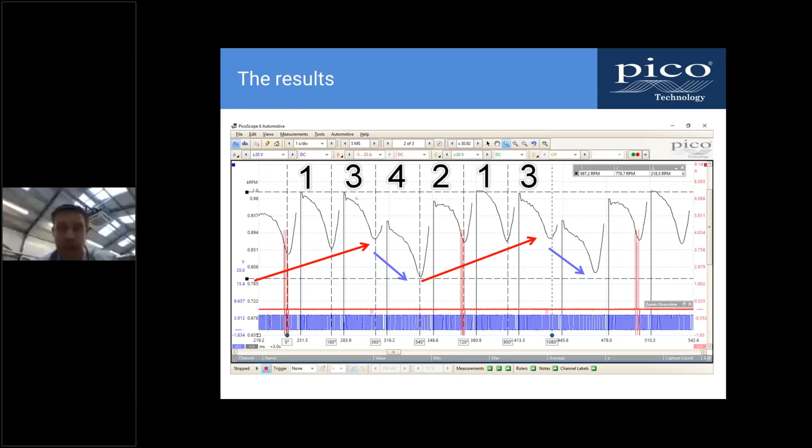So, okay, just a quick recap, don't be afraid. You will not affect the raw data by applying maths. Maths channels can be applied post-capture. You do need to know the number of teeth if we're going to use the crank maths feature. And then obviously when we're looking at the range, just be reflective of where your RPM was when you did the test. And as we said before, there is the maths channel, maths is cool, on the forum. A little tip there as well, guys.

9 times out of 10, one of the first things you'll do if you get a vehicle in the workshop with a fault is probably put your scan tool on. We're not saying the scope is a replacement for your scan tool, but it's certainly there to help and confirm and verify the problem.

Just remember, with misfire detection particularly, the ECU will look at the crank speed and determine which cylinder it is. So we're not doing anything really any different, but just verifying that that is what it's doing. So you have a look at DTCs first, they may help point you in the right direction, but then we can apply PicoScope to actually prove the fault.

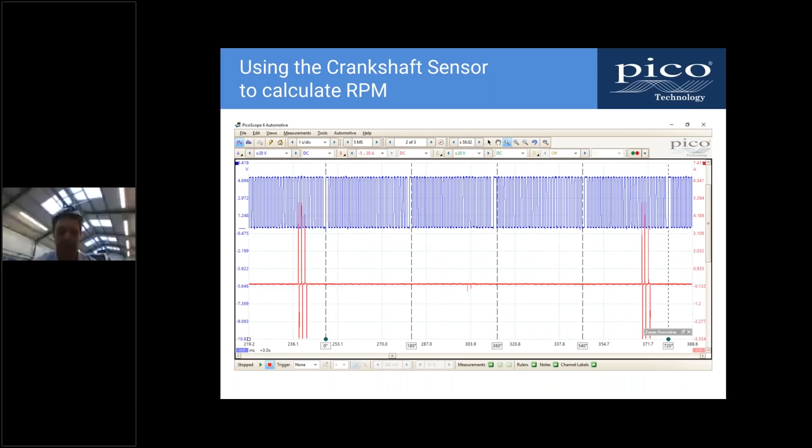Let me see if I can bring one of our slides back up so you can actually see the idea here. Let's just put this up, bear with me guys. Okay, is this going to work? No. It's going to be easier to just go back, sorry about this. This might play havoc with the internet, but let's see if we can get this slide up, because hopefully it will help with understanding why we're looking at cylinder 1.

I'm just writing this up as well. Okay, so cool, we should now have this slide up revealing the patterns. This is what we're looking for—that relationship between the crankshaft sensor and the injector for cylinder 1.

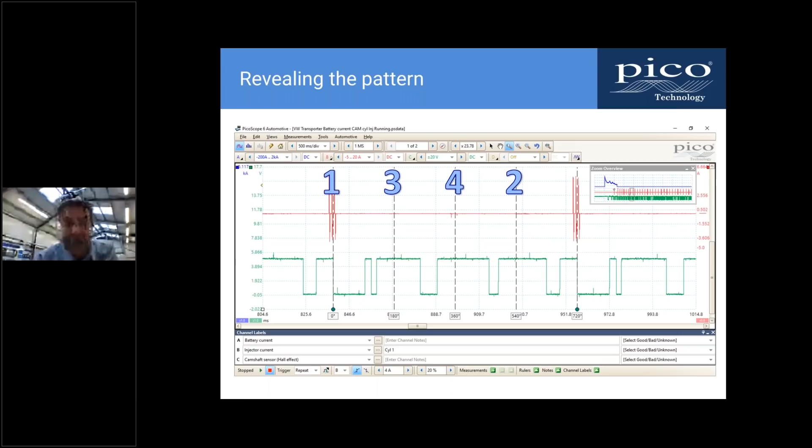It doesn't have to be cylinder 1, as we said—it could be 3, 4, or 2, whatever's easiest to get to, but it's about associating that with the camshaft sensor. The camshaft sensor is always going to pick up, regardless of whether the engine's running or in a cranking condition. From there, we can use that pattern we've just got, then perform the relative compression test again with just the camshaft sensor, and we'll be able to pick the pattern back up again in our relative compression capture.

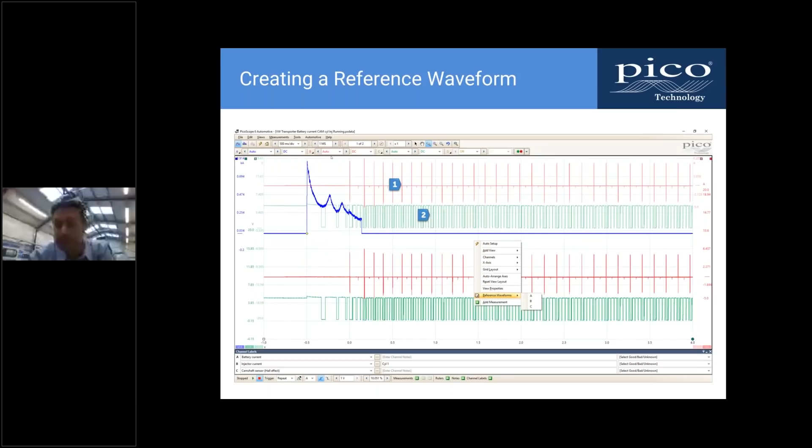Does that make sense now? So we should have that idea that we can associate the position on the camshaft with where the injector's taken place, and actually where our peak is in compression, so we can see the two together. That's why we do it, that's why it helps—obviously we lose that injector signal when we're doing a relative compression test.

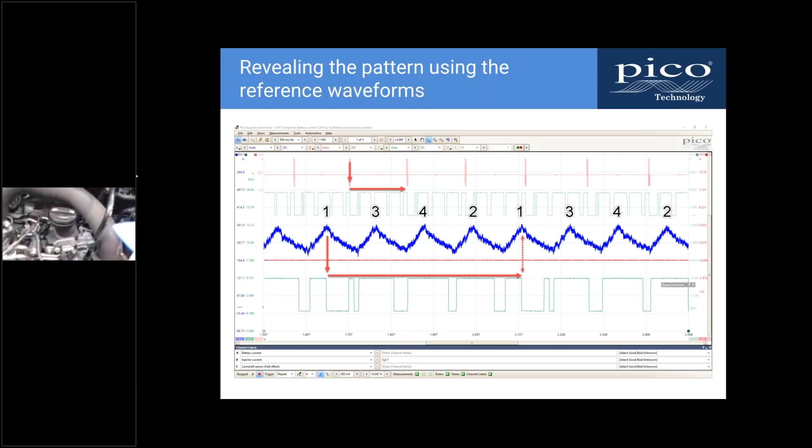You mentioned 4-23, slower sample rates. 4-23 is fine for sample rate if you've got that scope. It's particularly with crankshaft, I know we discussed that. So if you think it'll help improve your crankshaft channel, like I said, I put my sample rate up to 5 million samples. To be fair, there's nothing wrong with sticking to 1 million samples, you'll still get a very similar result. But if you increase your sample rate, it actually just helps the maths a little bit more, because you've obviously got more points for the maths to work on.

In-cylinder analysis, yeah, okay cool, we'll put that on using WPS as a topic. That's great, this is all great stuff guys. Thank you. It does obviously help us get a better idea of some of the problems you guys are seeing, and how we can use PicoScope to actually get to the bottom of these nasty faults that seem to be out there.

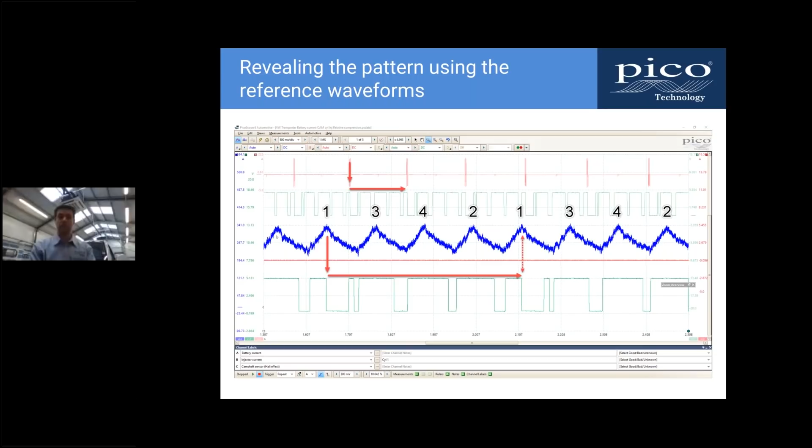Oh, good stuff, shall we? We'll just finish off the last few questions then, guys. Just skip forward. It's professional, isn't it? Yeah.

Excellent, you still in the middle of typing there, Steve? One more sentence, one more sentence. Okay, so I think we'll close it off then for today.

Thanks again, thanks for all your feedback, it's really appreciated. Like I said, I hope even if you got one little bit, maybe it's like 'oh, rotation rulers, didn't know they were there,' then great, and it will really help with your diagnosis in the future. One more, one more. This is just for clarity, because nobody can grasp all this in a quick sentence, so if they want more clarification, then I'll send it.